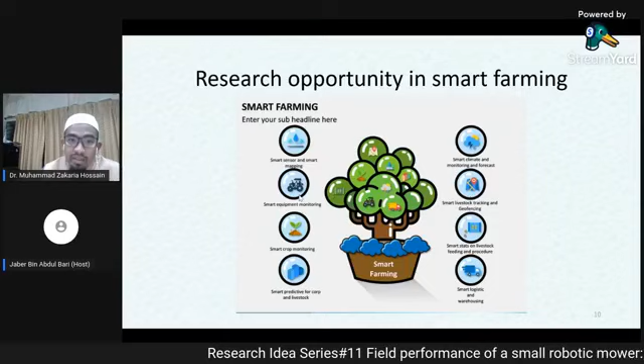Science and technology has improved significantly. People can use sensors to detect weed or pest infestation or other parameters, because many sensors have been developed and are being used in agriculture. There's also smart equipment monitoring. I had the opportunity to visit a company in Japan, I forget its name, that produces excellent unmanned tractors. It works by itself, no operator needed to drive it. It's robotic, working through GPS connection by itself.

Also very important is smart crop monitoring, to understand if a crop is facing nutrient deficiency or needs water, with the help of precision agriculture. And also livestock - there is much research now to study the behavior of cows or poultry, their food habits, through image analysis, deep learning algorithms. Many kinds of basic research are ongoing nowadays.

Climate change is a hot topic nowadays, and our countries are mostly vulnerable to it. I was astonished when in Japan to see Google weather - the information is very accurate there. If it said tomorrow will be rain, almost 90% of the time there is indeed rain. This kind of information is now also being used in agriculture to predict flooding or heavy rain. There's a lot of scope there too.

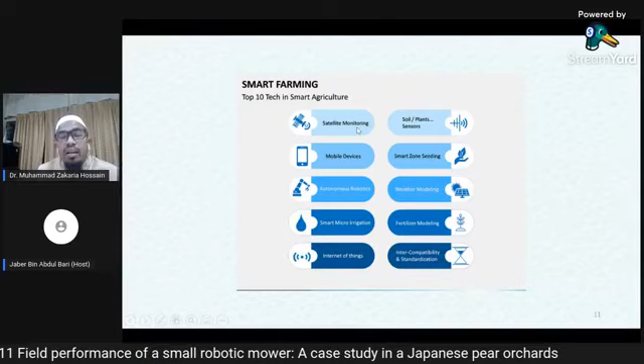One is satellite monitoring. This means using navigation for agriculture machines, or taking pictures of the earth to observe agriculture, afforestation or deforestation, or any kind of yield monitoring. It's also being used through mobile phones, what we call IoT.

And also autonomous robotics. For example, some development of robotic arms for harvesting, or to detect physical parameters related to pest infestation, among other things.

And also micro irrigation. I saw in Israel they are really advanced in drip irrigation. They initiated drip irrigation, and their irrigation system is mostly sensor-based and very advanced. So there is huge scope also in irrigation, we can use sensors, and this work is ongoing.

We already talked about the Internet of Things. Our government is really interested in working on the fourth industrial revolution, so IoT is one of the priorities for agriculture. I already talked about many kinds of sensors, for example soil moisture or soil pressure sensors being used.

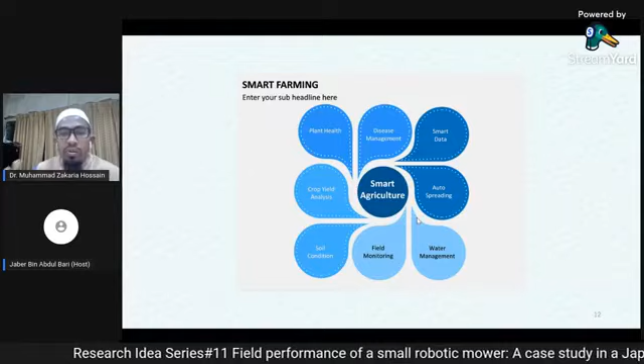Our main idea is plant health and disease management, how we can interpret the data smartly. We need analysis, and it's a kind of collaborative work, so we can use all these sensors and data to improve agriculture, to make agriculture smart.

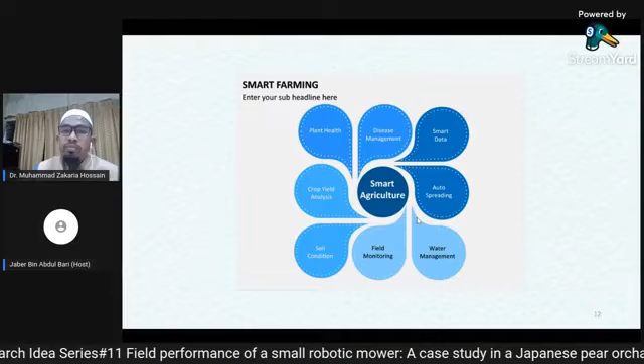So now some decision support tools are also being used for this. For example, if I find insects in the plant, I use sensors to understand there is an insect, detect its motion, and then spray some chemical, or inform the person that there is some infestation. This can be through a mobile phone, any kind of method. So this kind of decision support tool is also becoming popular nowadays.

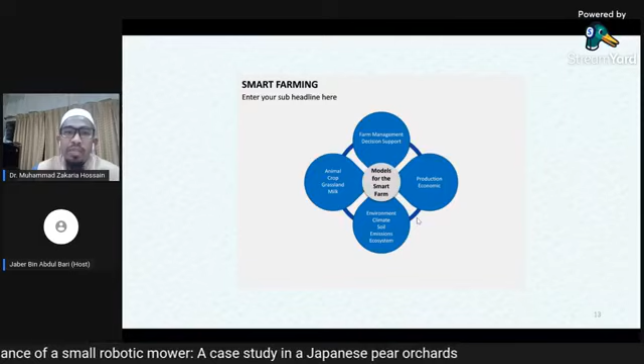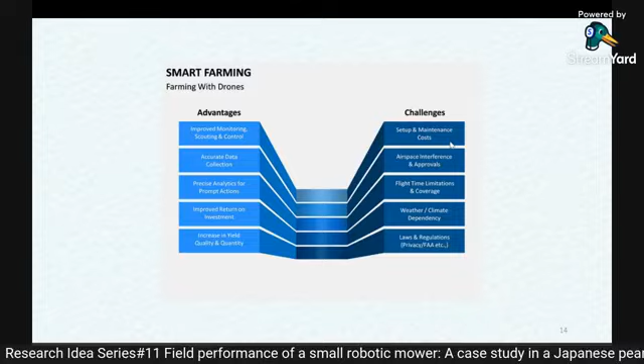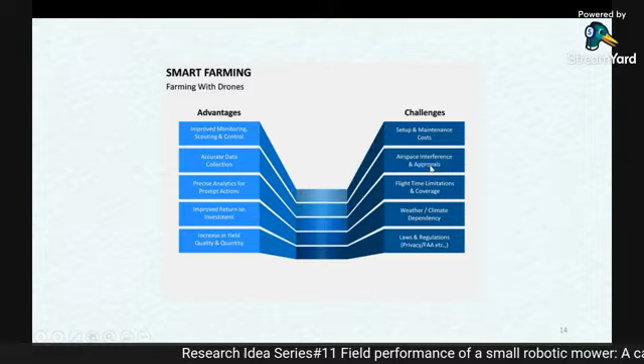There is no trusted platform there. Of course there might be many, but I still need to search for them. Also, there are some drone flying regulations. In our country there are still problems and limitations with drone flying, and the climate data in our country is not so good, so we cannot rely on this model, and also there are some laws and regulations.

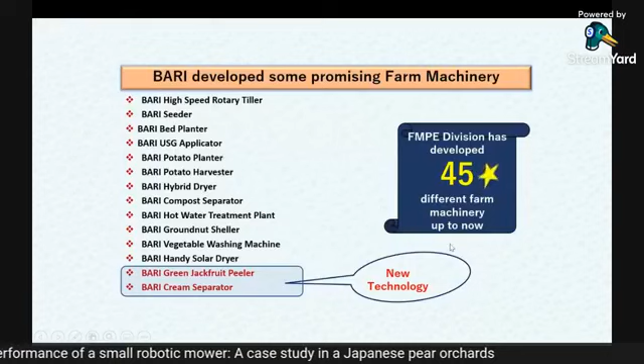Now I'm going to talk about the department I'm working in. We have so far developed 45 agriculture machines or technologies. I'm showing some promising ones here. Last year we developed these two machines already, this is a new technology.

This is a new technology. It means that the Bangladesh Agriculture Research Institute Farm Machinery Department has so many research programs, and we have opportunities for collaboration as well.

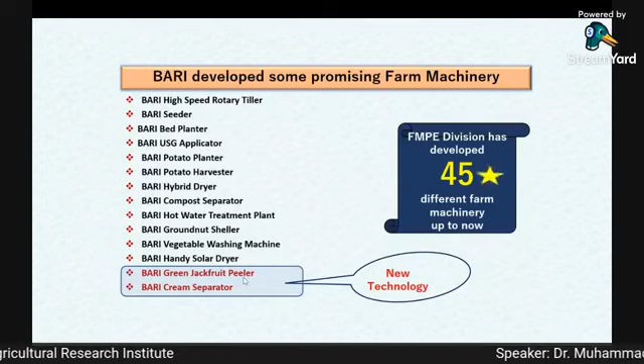I think this project has already finished. Last year we had the ASMC project, appropriate scale, in collaboration with some American university, and we also have many PhD students doing research here. Some master's students previously did research here too, so there is some collaboration if someone is interested.

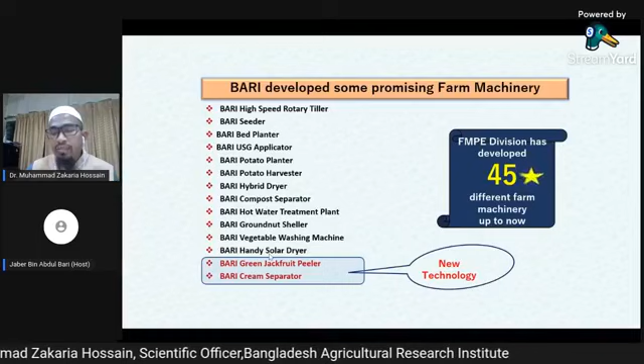And recently, because the ministry is also encouraging us to do smart farming research, this year we have many new research opportunities for smart farming. So if anybody is interested, they can contact us, and through the proper channel this can be arranged.

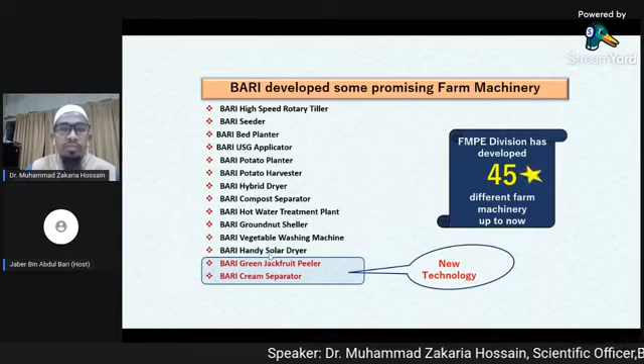So let's talk about today's seminar. Sorry, maybe I took a little bit more time on the first part. Most importantly, I'm going to talk about the field performance of a small robotic mower, a case study in a Japanese pear orchard. I will share my experience from Japan, which was part of my PhD work. So let's go through it.

Jaber, can you hear me? Yes, sir. Sorry. Loud and clear.

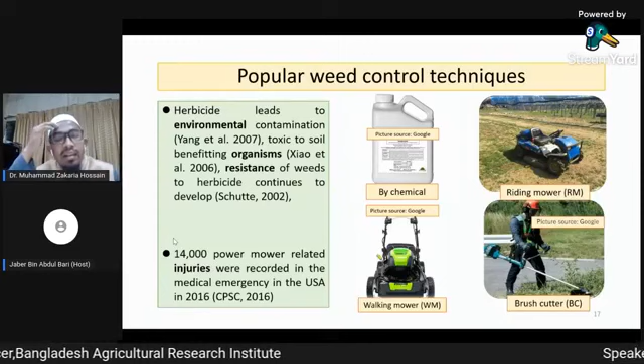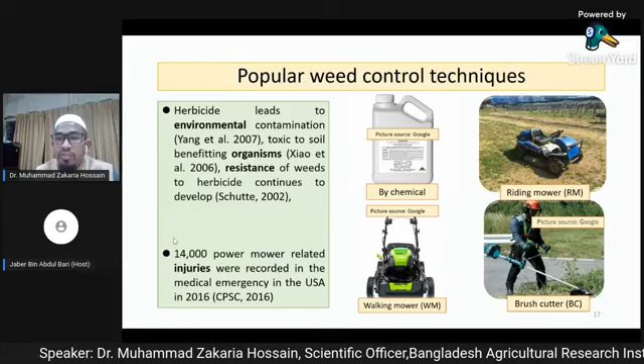Okay, thank you. So, popular weed control technique. In the world, herbicides and mechanical mowers are mostly used, but herbicide is detrimental for the environment, and power mowers cause many injuries. We all know about that.

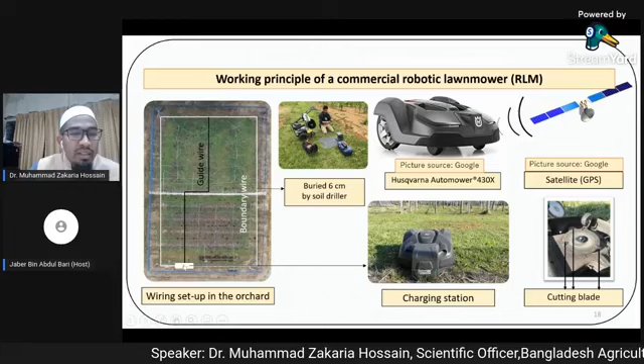This robotic lawnmower works independently. Let me share this slide here. So this white bar is the boundary wire. This is the charging station, and it also sends the signal all over, so that the robotic lawnmower doesn't go outside of this boundary wire. This boundary wire is buried under 6 centimeters of soil.

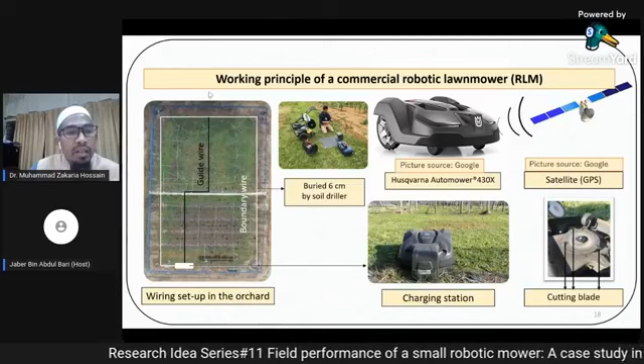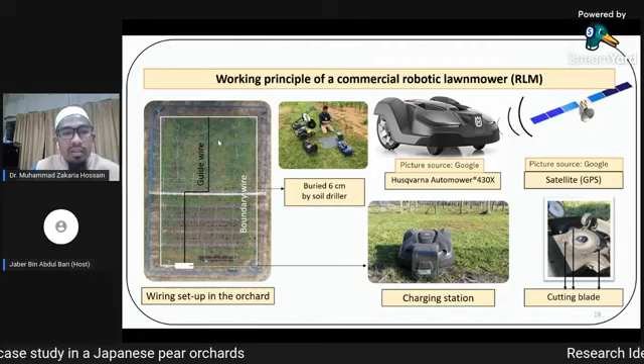And the black line is used when the robotic lawnmower needs charging. It uses this line to come back to the station, and it takes the charge automatically by itself. When it finishes, it starts working again.

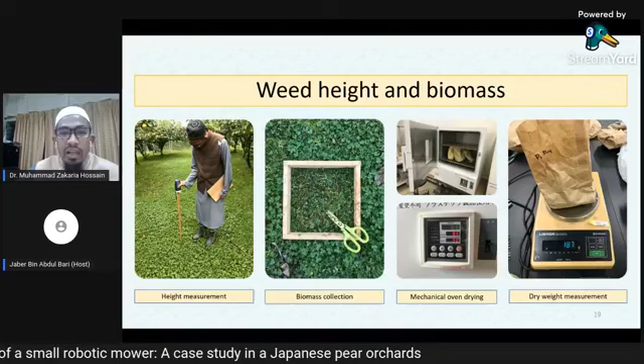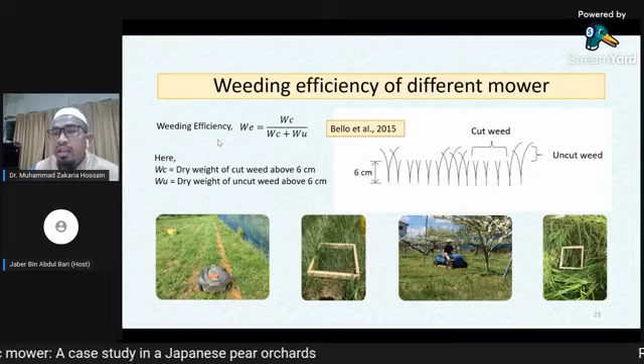During this experiment, I took some data for weed height, biomass, and also electricity consumption and energy consumption, how much fuel is needed for the mowing, and also some field data like weeding efficiency - how the robotic lawnmower's weed cutting efficiency compares to other mechanical mowers.

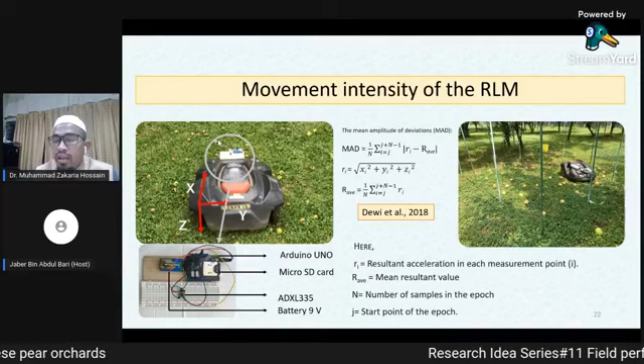I also took data on challenges in the field, because this robotic lawnmower is used in the lawn, but we wanted to study the feasibility in the orchard, since there are no commercial robot mowers for orchards. We feel it has the potential to work in the orchard, but there are some problems like fallen fruits, which occur during the time of thinning and harvesting.

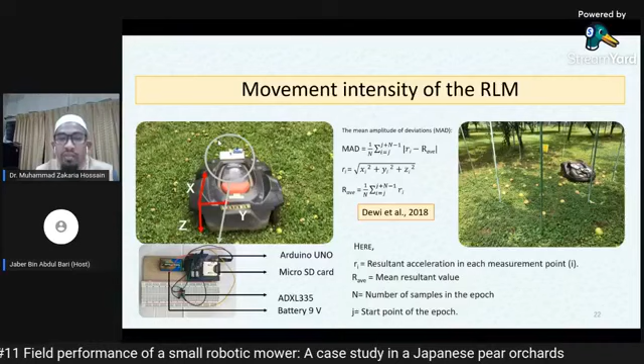So we detected the acceleration and vibration intensity. This Arduino UNO embedded accelerometer has been made by myself. I measured the data with that.

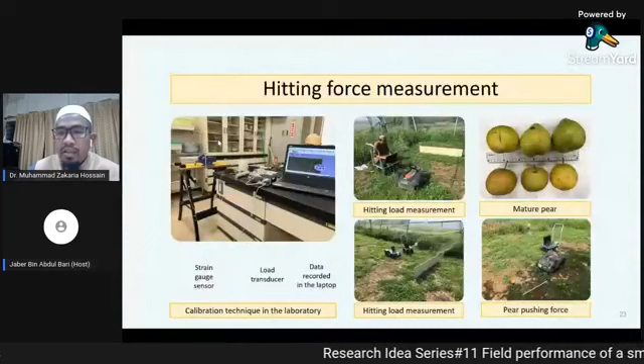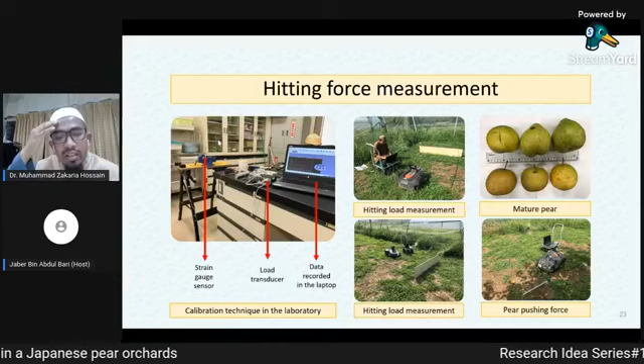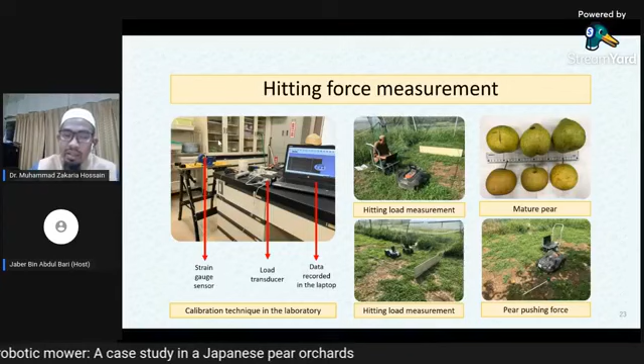And also in the field, and in the lab, I did the calibration for the load measuring. I used the strain gauge sensor and transducer to measure how many times it strikes the bumper and the load accumulated on the bumper, because the robotic lawnmower, when it moves and gets an obstacle, it gets stuck with the trunk of the tree.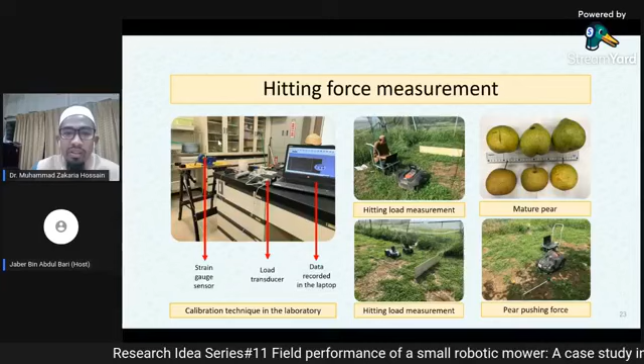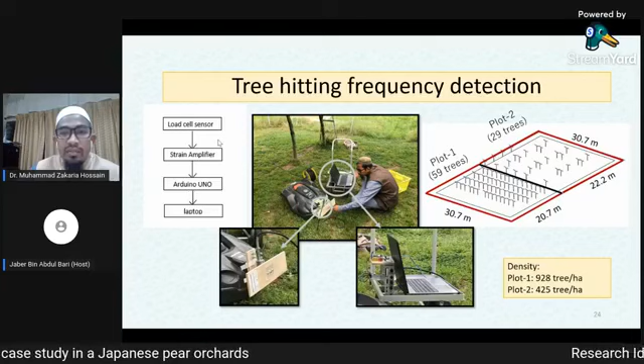So we wanted to see the effect - what is the effect of striking the trees? I also measured and detected the frequency, the hitting frequency, how many times it hits for different tree densities. I used the Arduino for detecting and the load cell for detecting the frequency.

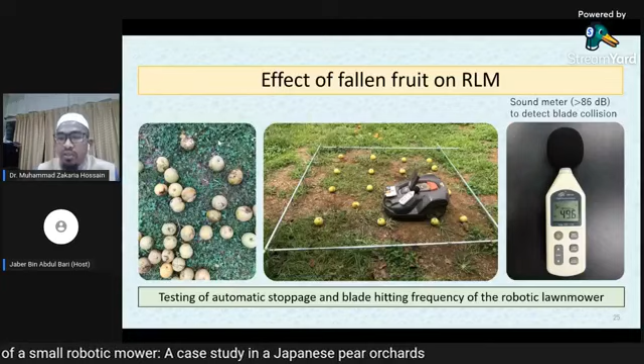Here are some other tests - how many times the blade hit the fallen fruits. So here is this data, and I also studied the economics through the ASABE model.

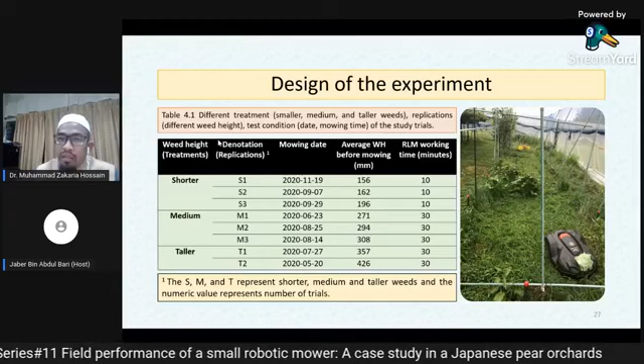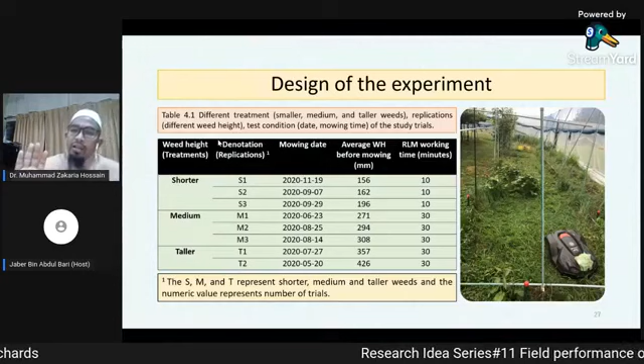Also, the most challenging part was that the robotic lawnmower is very small, but if the weed height is much bigger, it's really a problem for the robotic lawnmower. Because when it's moving forward and there are many obstacles, it cannot go further, so it stops and comes back again, which reduces the working efficiency.

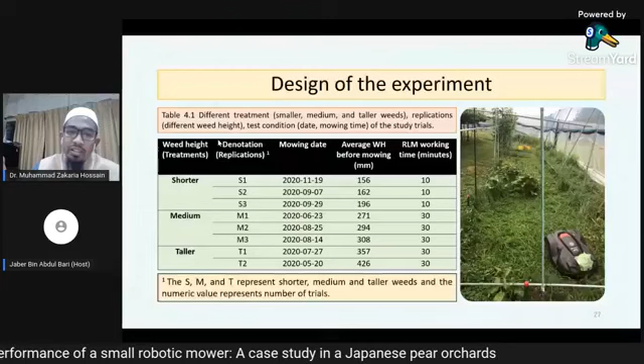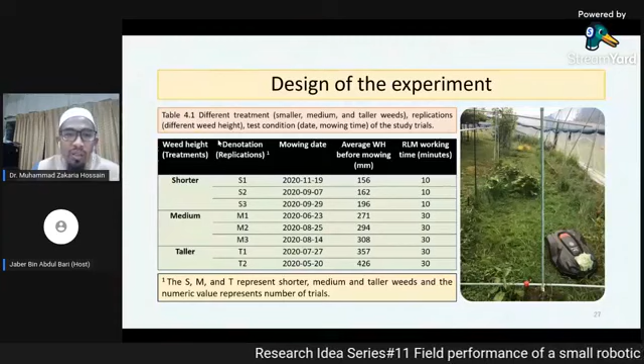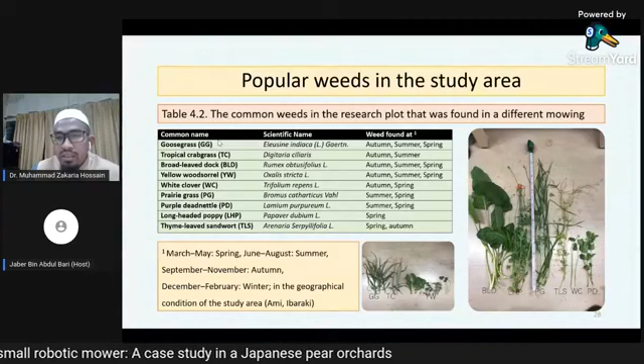So my idea was to see what is the optimum weed cutting height for maximum efficiency of the robotic lawnmower. So for different kinds of weed density and height, I did this. There were many kinds of weed in the plot - you can see the picture, many weeds there, and also how the performance was - cutting efficiency, field efficiency.

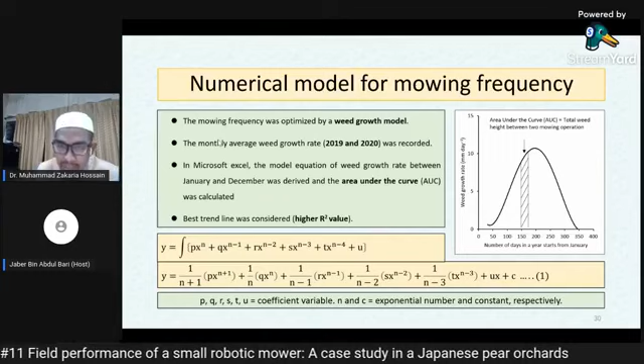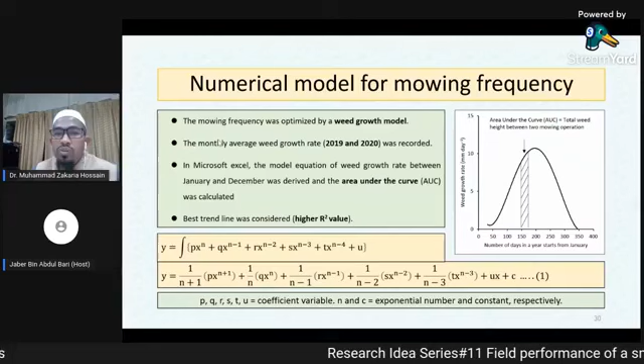And also the vibration. In order to find out the mowing optimization - I mean how many times I should work in a year - it has been prepared with the help of a weed growth model. I'll also show later how I used photogrammetry there.

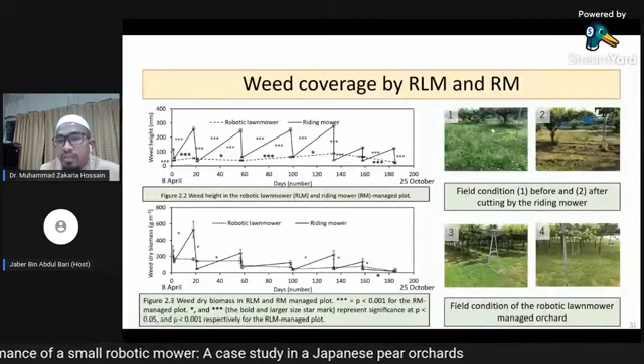And here are the results I am going to present. You can see the picture actually - this picture 1 and this picture 2.

This field is the riding mower managed plot. For this reason, the weed becomes - this is a conventional practice - the weed becomes very big, and then they use the riding mower. After that, it's not so beautiful looking. In number 2, you can see it diminishes the quality of the turf.

And you see number 3 and number 4, the robotic lawnmower working here all the time, same weed height, and very beautiful looking. Also, there is research showing that if the robotic lawnmower works continuously and the weed cutting, trimming is continuous, the quality of the turf improves. Turf is the beautified grass, especially you can find in the golf club or in the stadium. So you can see the beautiful picture there.

Also, the energy consumption of robotic lawnmower is low compared to riding mower, brush cutter, and others. Energy cost, CO2 emission, all we find the robotic lawnmower is better compared to other conventional mowers.

But there are some problems I already mentioned, that if fallen fruit is on the ground, the robotic lawnmower stops frequently, especially August and September, because this is the harvesting period. So the robotic lawnmower stops so many times. That's why we strongly recommend removing all fallen fruits or any foreign object from the ground. You can see even the chassis clearance is not so much, so the wheel ends up flying, rotating freely in the space.

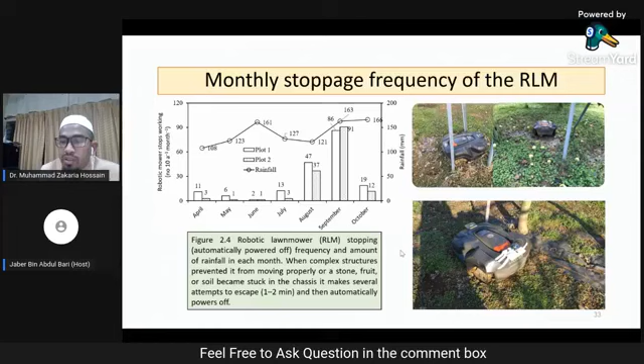Also, we find that the robotic lawnmower needs less labor compared to riding mower. But in August and September, the robotic lawnmower needs more labor because of the harvesting time problem. This is research - we did not remove the fallen fruits, we did this research on purpose. But that's why we encourage them: please remove all fallen fruits from the ground. Still, you can find the robotic lawnmower needs low labor compared to other mechanical mowers.

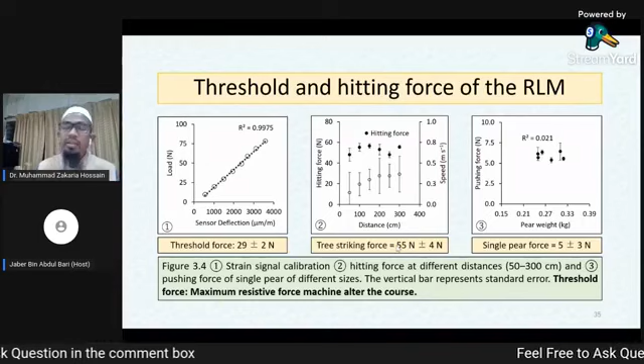Here's a very interesting thing: the hitting force for a single strike is 55 Newton, meaning almost 6 kilogram. So if one time the robotic lawnmower hits a tree with 6 kilogram force, it's huge, because it's working 24 hours, from April to October, 16 hours working per day, 8 hours charging. So that's why you can see the structure - you can see it broken.

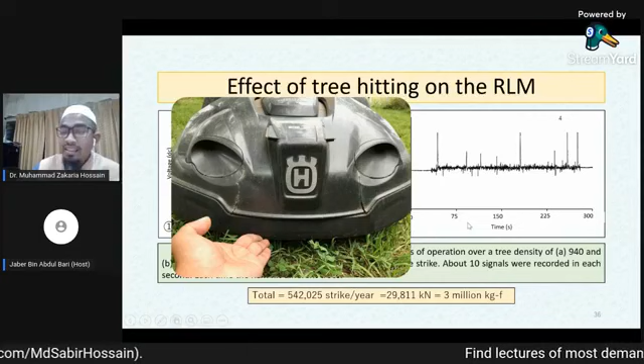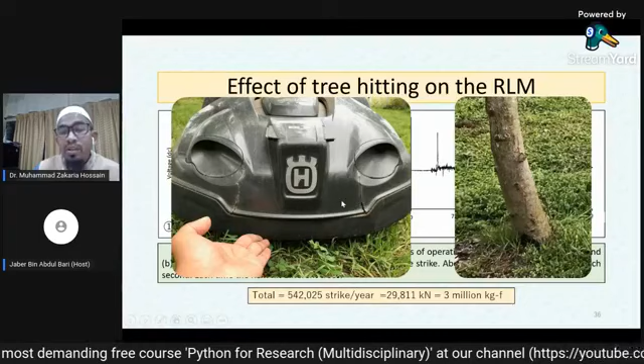Unfortunately, the bumper broke, because there was a cumulative force of 3 million kg force there. But there is no injury to the trunk - that's good, but it doesn't make sense that the robotic lawnmower needs to replace the top body every year. That's why this is my solution. This is my solution - what is my solution?

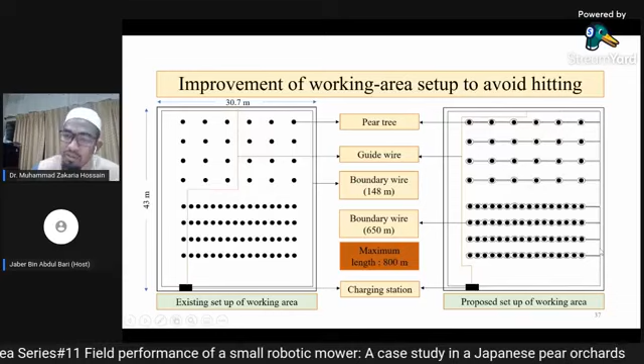The solution is that this boundary wire goes outside, making a path around the tree so that there is no hitting with the tree. Yeah, of course maybe weeds will grow in between - we need to manage by hand or some brush cutter machine. But still, it's good for the robotic lawnmower because it's very expensive to change the top cover. So that's my suggestion.

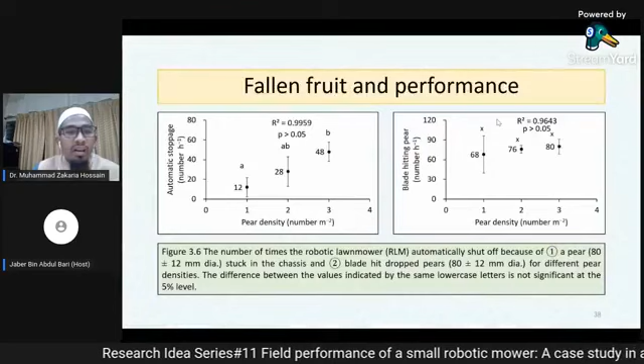Also, fallen fruits make a problem - as the number of fallen fruit on the ground increases, the number of stoppages also increases. This is a big problem, that's why we say please remove them.

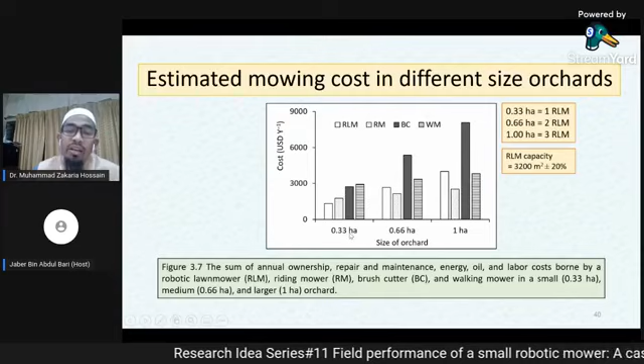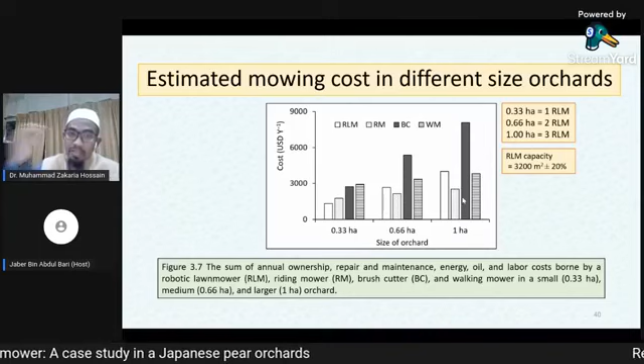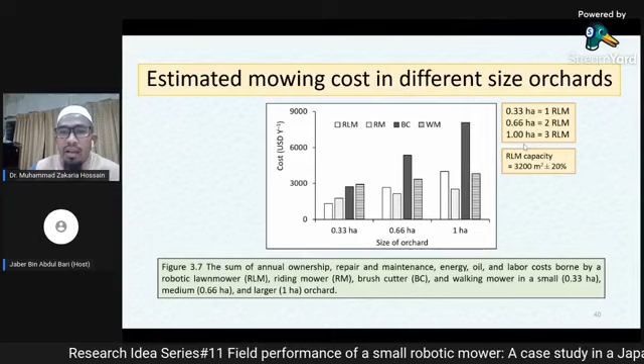And here's some economics - I'm not going into detail with the calculations. The main point is that the robotic lawnmower is economical for 0.33 hectare, because the robotic lawnmower's capacity was 0.33 hectare. If you have 0.6 hectare, you need 2 units of robotic lawnmower. If 1 hectare, you need 3 units. So it increases the cost, mostly depreciation cost, because this is expensive - not so expensive, but still expensive. So we recommend if you have a small orchard, please buy it. Otherwise, please don't buy it if it's a medium or large orchard.

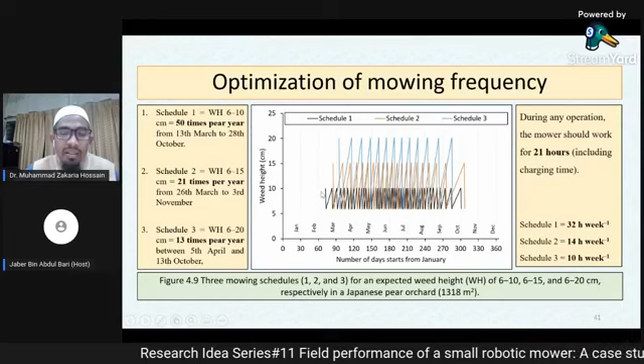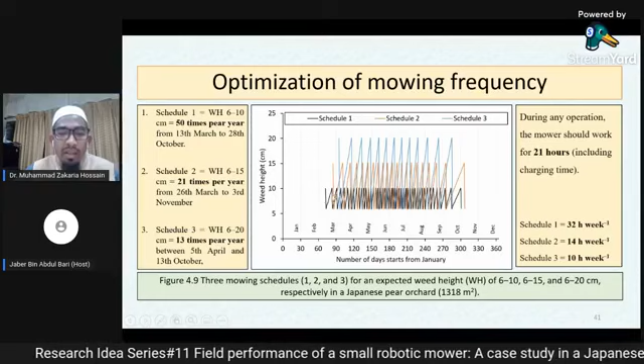And we also made some optimization of mowing frequency. It's very interesting that if you want to keep the weed height between 0 to 10 centimeters - actually not 0, it's 6, because the maximum blade cutting height from the ground to weed should be 6 centimeters. So from 6 to 10, it's very normal that if you want to keep the height less than 10, the robotic lawnmower should work many times. This is the starting point, then weed increases, then it's cut, weed height becomes very low, then it starts growing again, becomes 10 centimeters again, cut again. So if we want to keep it at 15 centimeters, 20 centimeters, this is the number of cutting times needed. For example, for schedule 1, what is schedule 1?

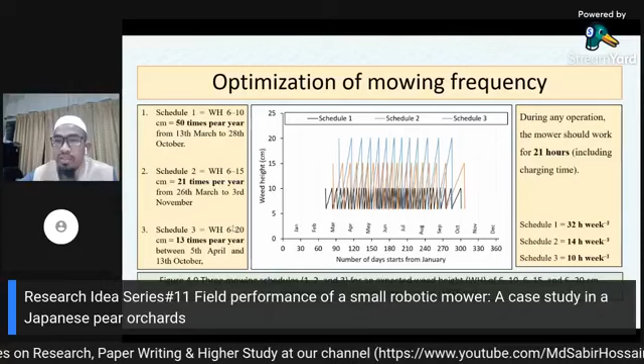Schedule 1 is to maintain weed height less than 10 centimeters, with the robotic lawnmower working 32 hours per week. Schedule 2, less than 15 centimeters, is 14 hours per week, and schedule 3, less than 20 centimeters, is 10 hours per week.

It's very good that the robotic lawnmower has this timer function, so you can set the timer. I feel these are very good findings for the farmer, so they understand how long they should run their robotic lawnmower in order to maximize efficiency and reduce wearing out or damage to the body.

So let me conclude my findings. The robotic lawnmower's weed control ability was good, better compared to the riding mower. We had two orchards, and the robotic lawnmower managed orchard had lower weed height compared to the riding lawnmower managed plot. We also found the energy efficiency was better in the robotic lawnmower plot.

The operation cost of the robotic lawnmower was cheaper compared to the conventional machine for small area orchards. Our study reveals that the robotic lawnmower had lower labor requirements also, because the riding mower needs an operator, but the robotic lawnmower does not need one.

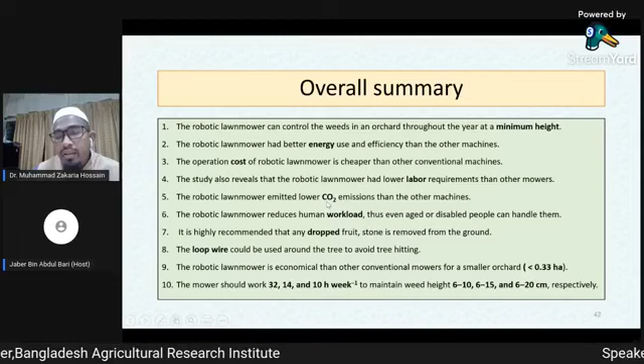Why carbon dioxide? Because it's run by a rechargeable battery, but producing the electricity also needs some energy, maybe from coal or petroleum oil combustion, so it also produces carbon dioxide. But the other mowers produce carbon dioxide too, one from mining from the ground, another when they use the machine.

So we call the robotic lawnmower less carbon dioxide compared to other machines.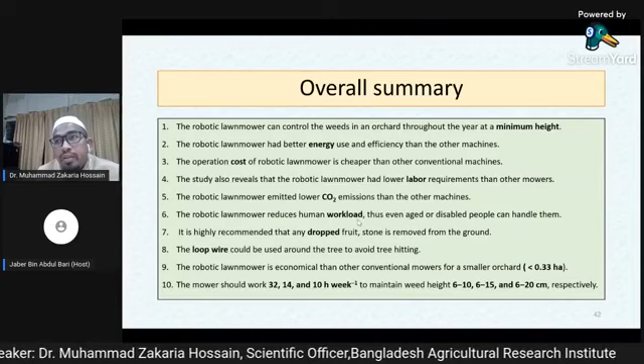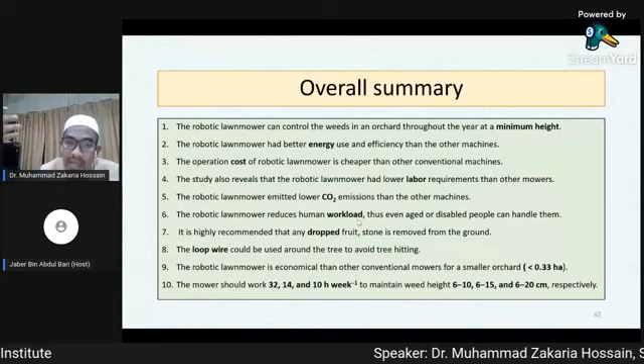It also reduced the workload, which is very interesting, because in Japan the average farmer age is almost 65 to 70. The problem is that aged people, some may be disabled or have other problems, so that's why Japan now needs the robotic lawnmower so much.

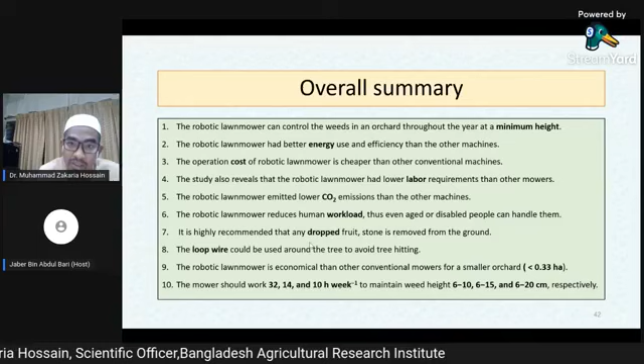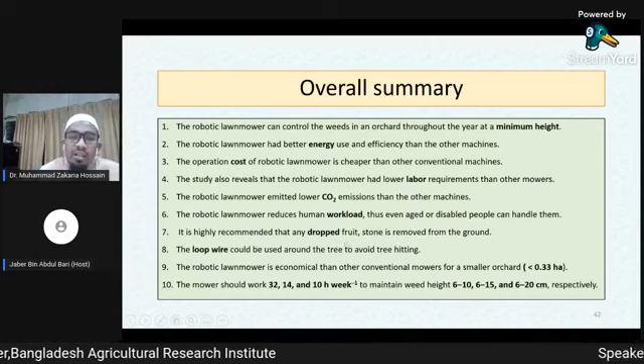Not only robotic lawnmower, but any kind of robotic technology they need. Other countries also have this problem, and it's becoming acute, with developing countries soon handling this too. In terms of management practice, we say please remove all fallen fruits from the ground and any foreign materials, and the boundary wire last time was not designed properly.

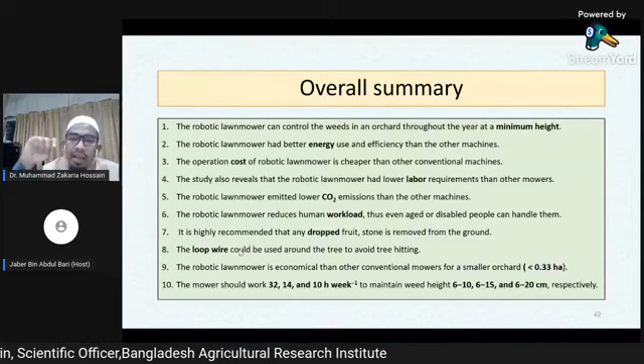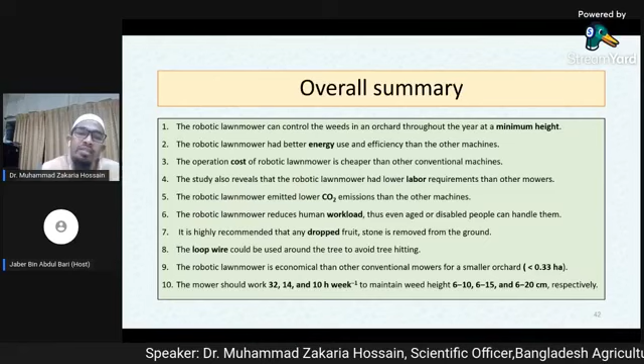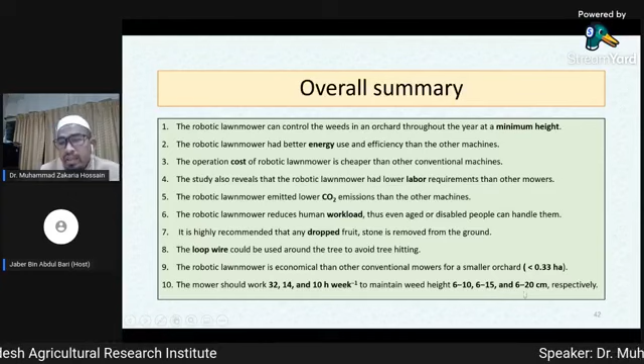So I propose a new technique. I hope it will help reduce the problem associated with hitting. This time the robotic lawnmower is economical for only 0.33 hectares, and should work 32, 14, and 10 hours per week to maintain weed height less than 10, 15, and 20 centimeters respectively. Our research limitation is that this PhD work was only 3 years.

So we need long-term observation, and it was only on 2 orchards. Maybe it can be tested on many orchards, especially in farmers' fields, because farmers' fields are always different from the real research field. I think it would be better in the future if someone can do it.

We used the Husqvarna 430X model, manufactured in Sweden. There are many other models, for example large commercial robotic lawnmowers that now handle 1 or 2 hectares. Our model has very low capacity, so big capacity models may show big opportunity in the future, and this work can be done then.